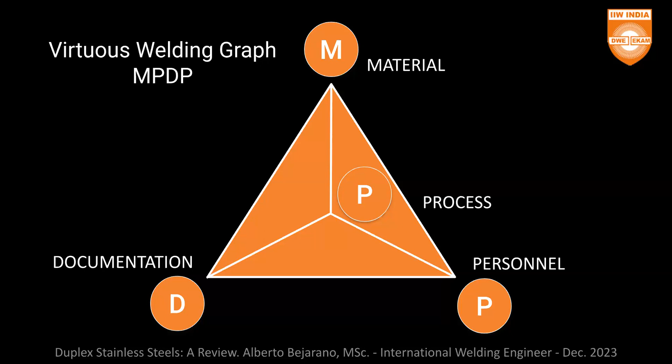Documentation is very important for us because there are a lot of different tests that we have to carry on in order to obtain a good qualification of our procedure, our WPS. Documentation, in this case, always is important - the standards, specification, codes, etc. in the welding world - but in this case, with duplex stainless steel, it's even more important.

So I want to share with you two phrases, two sentences that I consider are quite important for understanding this topic. The first one is: the best weld is the one that doesn't exist. Why? Because we have a beautiful raw material and a beautiful base metal with enormous advantages, but we partially destroy these beautiful properties.

So our idea, our goal, our challenge is how to weld, how to process this duplex stainless steel with the least damage possible. This is our challenge, and this is what I want to share with you today. And the main idea is to control the welding process. Every detail is important in duplex stainless steel, as we can see in a moment.

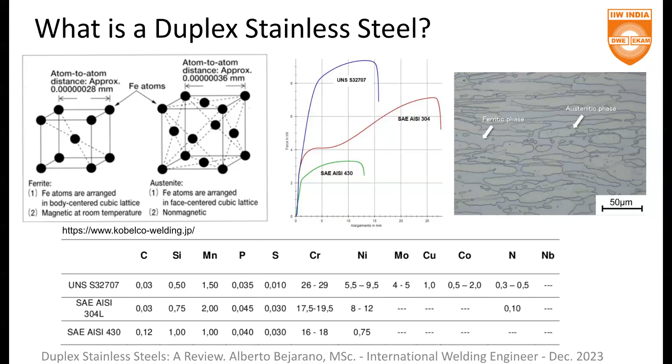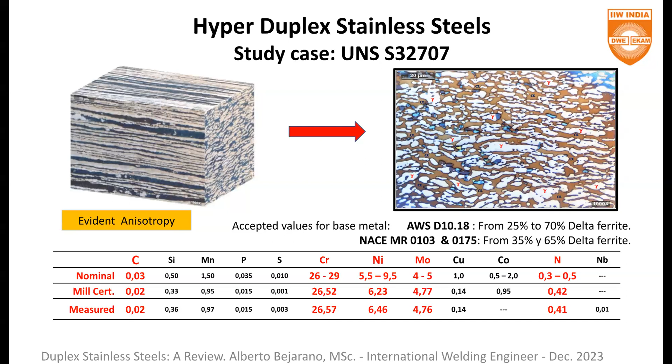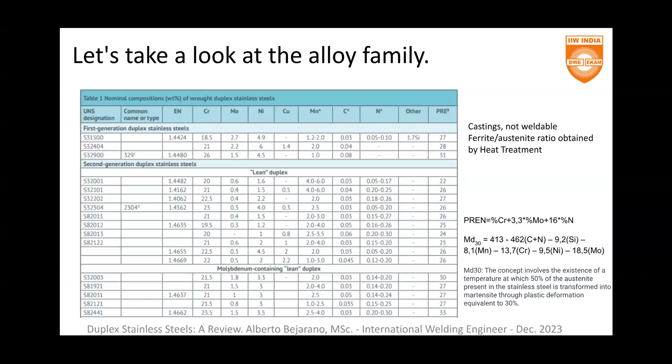And the top of the notch is the hyper duplex member, which is pretty... I think someone has his microphone open, so please turn off.

In hyper duplex, we are talking about 50 to 52, more than 50, which means that a hyper duplex has double the corrosion resistance compared to lean duplex. Which is quite remarkable.

If we see here in the austenitic family, let's take 316L, which of course has molybdenum, 316L has a PRE equal to 24. 316 is quite relevant in terms of corrosion resistance, and a hyper duplex has double the resistance.

And with a consideration very important in terms of money: if you see the quantity of nickel that 316L has, it's 11%, but hyper duplex only has from 6.5 to 7% nickel.

In fact, the promotion of this kind of stainless steel was done because of the crisis of nickel. The price of nickel had a rise that was pretty difficult for steel makers to follow. So they started working again with this alloy and family of alloys, and it was a total success.

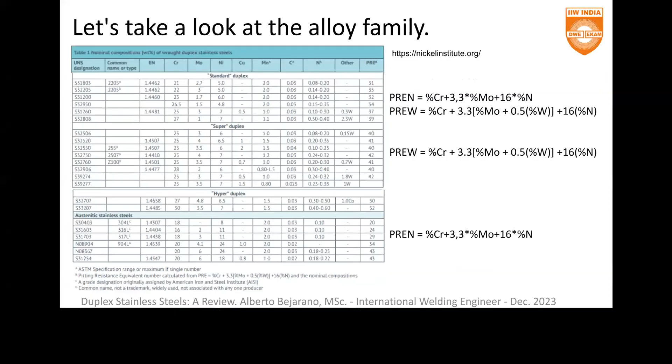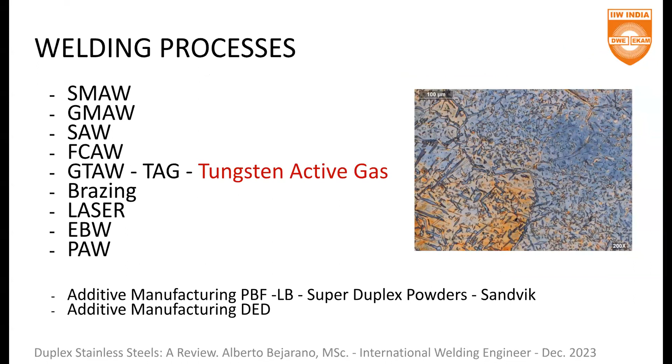In the weldment of duplex stainless steel, we can have pretty good results with shielded metal arc welding, gas metal arc welding, submerged arc welding, flux cored arc welding, gas tungsten arc welding, and even brazing is possible to be used with this kind of material, which is quite remarkable and very useful.

Laser, electron beam welding, and plasma arc welding. Of course, we have laser with or without filler metal, electron beam welding with or without filler metal, plasma arc welding with or without filler metal, and gas tungsten arc welding with and without filler metal.

Some people believe it's impossible, but it's not impossible. It's just a little more exigent in terms of control of the parameters, the technological parameters, the gas, the filler metal, the control of qualification of our process, the control over the staff, the welders, the tack welders, the supervisors, inspectors, engineers - everyone involved must be clear about what duplex stainless steel means. But everything is possible with duplex stainless steel.

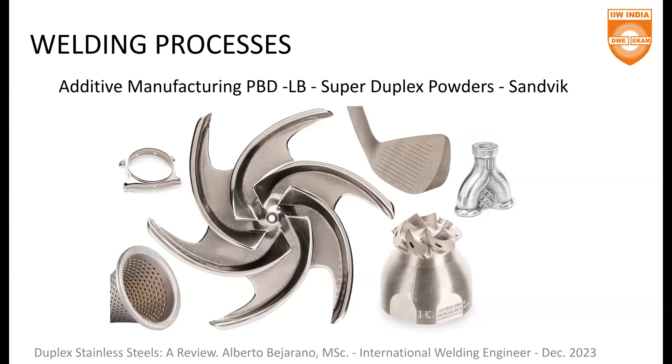So here we have some examples of products which are susceptible to being printed in duplex and super duplex stainless steel. This is powder bed fusion, which is very fine in appearance, and here we have welding processes. This is direct energy deposition, which is to weld layers and layers and layers of welding in order to obtain a base volume, which normally has to be machined by a traditional process in a CNC lathe or something like that.

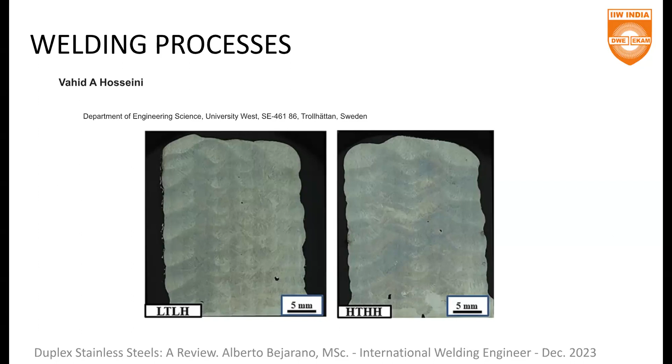But it's very important—here we have a macro showing us this research project from Vahid Hosseini from the Department of Engineering Science in Sweden, in Trollhättan. So as you can see here, layers and layers and layers of welding in order to obtain a block, to then obtain a piece.

Now let's talk a little about the filler metals. The problem, if you remember, is that it is not possible to maintain the initial properties in the base metal. So we have to add a little more nickel. Remember the two main elements here in this story: nickel and nitrogen.

So we have two options: to add nitrogen up to 2%, and we'll see why we use 2%. If we use filler metal, we add from 2% to 4% of nickel, because nickel promotes the austenite. Remember, the key here is austenite—we love ferrite, but we do really need austenite.

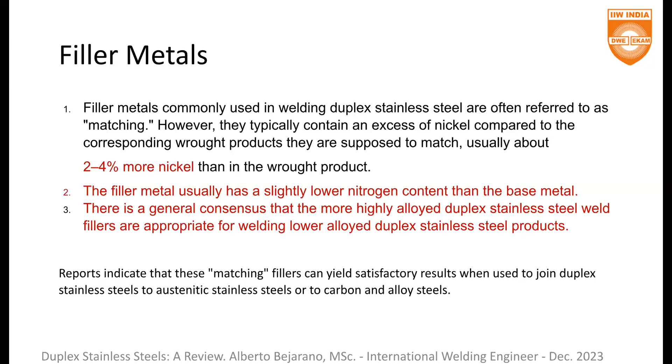And if we are not using filler metal, which is possible, we have to add 2% of nitrogen in the shielding gas—but not only the shielding gas, also the backing gas. It's very important. There's a lot of literature that tells you that you can use 10% or even higher percentages of hydrogen, which is very, very dangerous, because a shielding gas with more than 5% hydrogen is considered flammable, and flammable means explosive. So it's much better to work with nitrogen—2% nitrogen balance argon.

What about the filler metal? How can we select our filler metal? It's quite simple. Doesn't matter if you talk about ESAB, Certilas, or Sandvik—whichever—everyone will offer you an alloy with more than 2% or 4% above the original value of nickel. That's the key. Nickel 2%, 4%, that's all. They have it clearly. We know which filler metal is able to have a good response with a specific kind of duplex. So selecting the filler metal is not the problem—there's enough information about that, so don't worry about the selection of the filler metal.

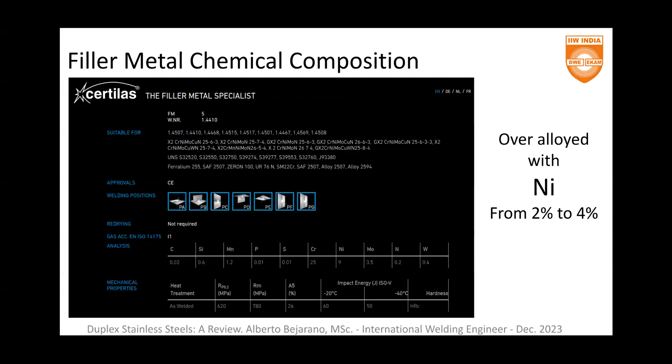So for instance, in that case we have 9% of nickel, which is higher by 2%. Let's check one or two products from ESAB—they have a line of products called Exaton. Exaton is the same: look at that, nitrogen, 8.5% of nickel, that's all. Of course, they have manganese, they have very low carbon, 0.040.

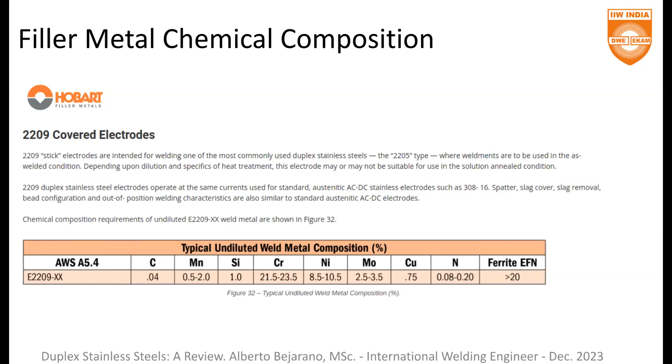The Exaton for GTAW, if we want to work with Hobart, is exactly the same. Hobart offers even more nickel, 8.5 to 10.5, in order to promote the generation of austenite. If we see Kobelco from Japan, the same logic - include more nickel. That's all, it's pretty simple. Of course we have to do the match between the filler metal and the base metal - that's obvious, that's logical, that doesn't resist any analysis. But it's not trivial, though it's quite simple. The most important thing is that if you understand the role of nitrogen and nickel, you will be successful in your work related with this kind of alloy.

Let's talk a little about shielding gas. Of course, shielding gas is related with GTAW, with tungsten inert gas. But we also have flux core shielded, and GMAW. Normally with GMAW it's pretty common to use 80% argon, 20% CO2. The magic is done through the alloying elements. You have a lot of literature that recommends hydrogen, helium, nitric oxide. In general, this is more an offer from the industrial gas producers, more related with marketing than produced through real experimentation.

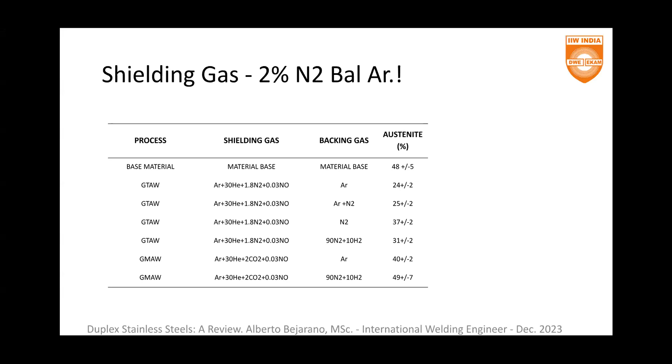So if you check, for instance, these pages, they give you the right mix. For instance, in Kobelco, if we work with super duplex stainless steels in flux core, we have to work in DCEP, direct current electrode positive, 80% argon, 20% CO2 - the all-life shielding gas, nothing special. If you see the standard duplex flux core, DCEP, 100% CO2. So the filler metal is not a problem because it has more nickel, and the shielding gas is not a problem.

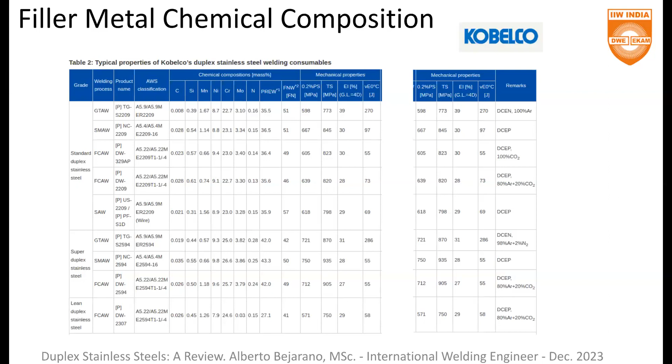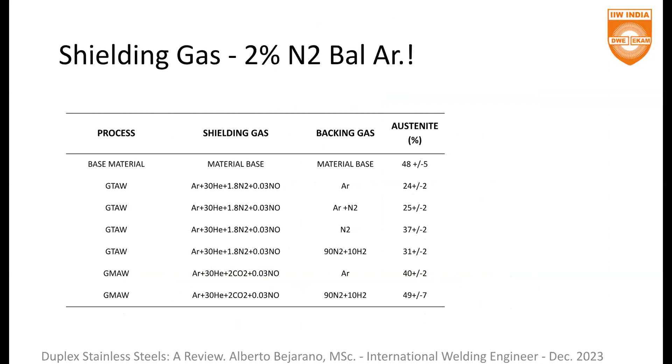Okay. So the shielding gas is not a problem if we have filler metal. Have that clear in your mind. Okay.

This is quite interesting. How much heat input was applied during the welding? Okay.

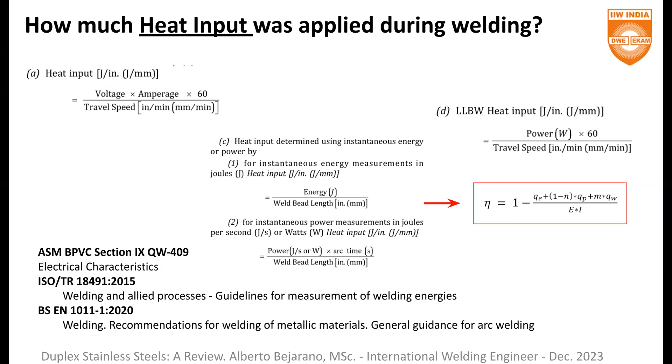Probably the most tricky thing when you are welding duplex stainless steel is that the cooling rate must be adequate. And when I say adequate, it means it can't be very low or very high. We need a cooling rate enough to produce enough austenite, because remember these alloys solidify 100% ferritic, okay? And not too much in order to prevent the precipitation of the deleterious phases.

Okay, so have this in mind: who defines the cooling rate? The cooling rate depends on the thermal properties of the material, and what is the amount, the quantity of heat that the base metal receives. Okay, this is quite important, and we have to talk about some details here.

Normally, the heat input is calculated by the use of the arc power, which means voltage multiplied by amperage, divided by the travel speed. This is a classical, traditional point of view, but it's only applicable, only useful with traditional technologies, which means traditional equipment with no other special control on the wave. Okay, the very basic equipment.

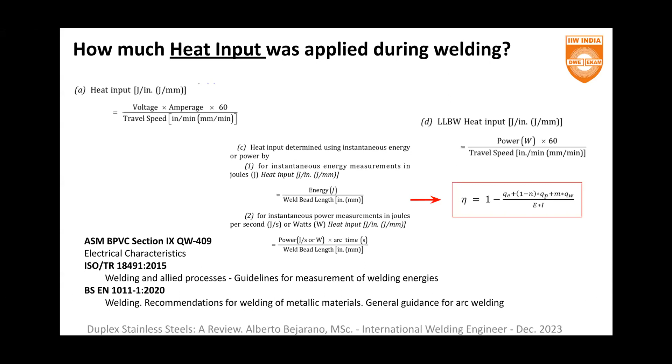Okay, and these losses are quantified by the use of an efficiency coefficient. As you can see here, I think it's eta, it's a value that affects the heat input, okay? This theoretical heat input. And this is quite remarkable because, as you can see here, only submerged arc welding has a K factor of 1. So if we calculate the heat input in submerged arc welding with voltage multiplied by current divided by velocity, this is the only case in which that value is real, because all the power in the electrode is given to the base metal. But in other cases, that's not true.

If you see, for instance, TIG welding is only able to take 60% of all the power in the arc and carry that power to the base metal. So we lose 40% of the original heat input, which means that at the end we need more power.

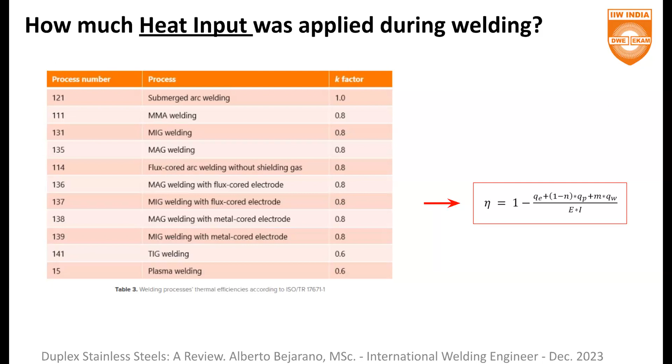And I will show you why this is so important. So real values for heat input using the K factor, having in mind the technology of your machine, etc. How much heat input was applied during welding? Again, we have this technical report from ISO which shows us how to calculate and measure these welding energies even in the field.

Of course, we have a very good document from Sweden, which is the guideline on how to measure current, voltage and arc power in arc welding. If someone wants this document, I can share it with you, no problem.

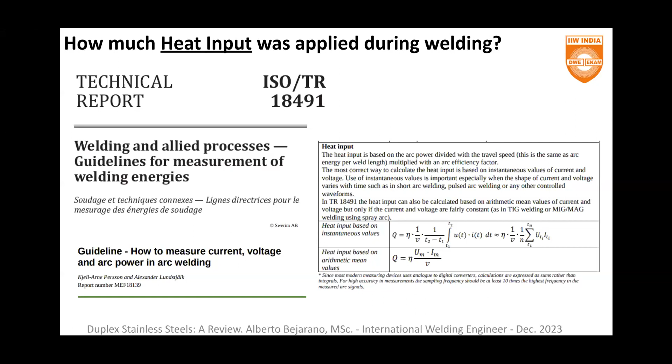Okay, this is the reason we need this equation. Let me check if I can use a pen here. Check. Okay, normally we use this. Let me show. Okay.

Normally, we are interested in this temperature, T8/5, right? So we need the thermal properties of our material, T0, which is the initial temperature, and the heat input, and that's all. We need this temperature.

But in this case, when we are talking about... I'm sorry.

When we are talking about duplex, we are interested in this temperature, T12/8, okay? But we needed this one in order to calculate this one. And why this time is so important - it's so important because we have to be able to cool our alloy.

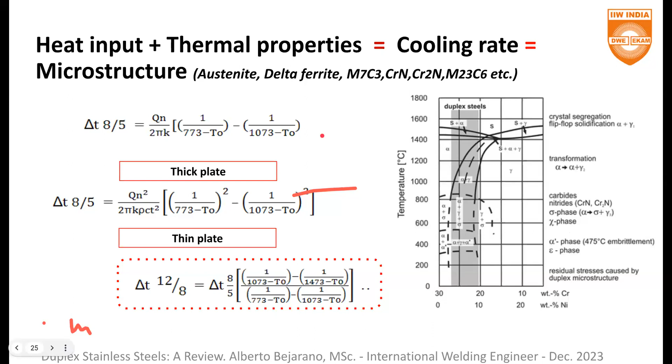Of course, as you know, we have to consider if we are welding a thick plate or a thin plate. The difference is: if I'm able to weld using just one bead, that's a thin plate. If not, it's a thick plate and I need more than one bead - we're talking about a multi-layered joint.

So my idea is to come here from liquid and don't touch these curves, these noses. It must be enough to produce austenite, and must be very quick not to touch these noses. That's all the clue of this material.

Of course, it's quite difficult not to obtain at least a little amount of these deleterious phases, but it's what it is. Nobody wants residues or losses, but the real world is full of this kind of losses.

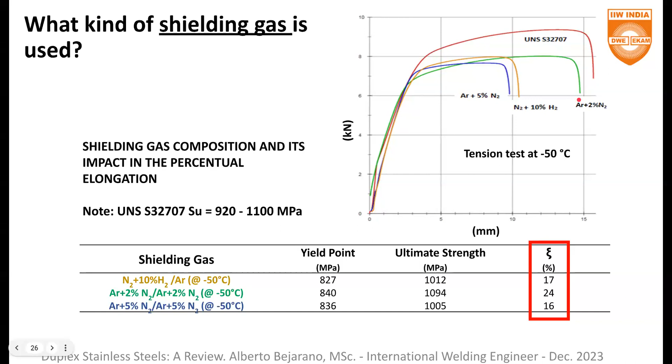That's pretty good. If you see here, even the percentual elongation is a product related to the shielding gas you are using. Imagine that with 2% nitrogen you obtain 24% elongation, and only 16% with 5% nitrogen - that's pretty amazing, because the difference is only 3% nitrogen. Pretty good, I hope you are following me.

Good, so we decide which base metal we will use, we select the filler metal, we select the process, we select the gas. And now what happens? We calculate my heat input.

We calculate my real heat input by use of this K factor that we mentioned some minutes ago. And now what? How could I know if my joint is solid, if it's good?

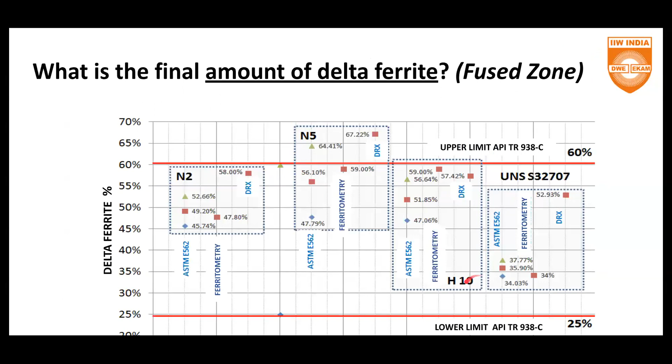36%, okay? This is the value of my base metal, right?

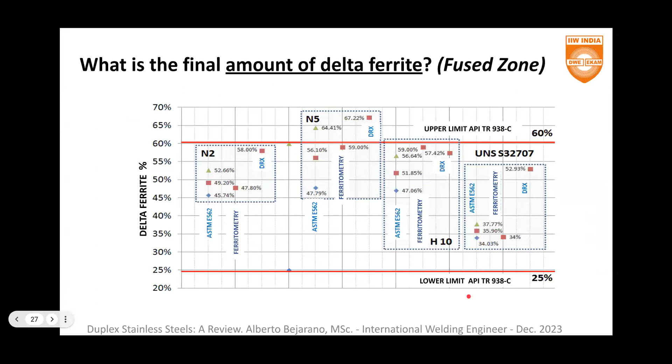And by the use of 2% nitrogen, 98% argon, we obtain this value: 49% ferrite, which is not bad, because we are between two limits. The first, the lower limit of this delta ferrite, is API TR 938-C, which allows you to obtain 25% as minimum to consider that your work was well done. But we also need an upper limit, and the upper limit is 60%, which comes from the same standard - API, American Petroleum Institute, TR 938-C. Pretty good, this is amazing.

We select the filler metal, the base metal, and so on. Now we are evaluating the result, and this evaluation is quite important for the qualification of our procedure. So if we take, for instance, ASME Section 9 from the Boiler Pressure Vessel Code, which is aimed to guide you with the qualification of your process and your staff, you won't find any information about these details. They tell you, okay, you need 2 tension tests, 4 guided bend tests, whatever. But remember that what rules over Section 9 is the construction code. So the construction code gives you all these little details, and if the construction code doesn't mention anything, you have to talk with your client and ask him what his need is, and try to find the best solution for him.

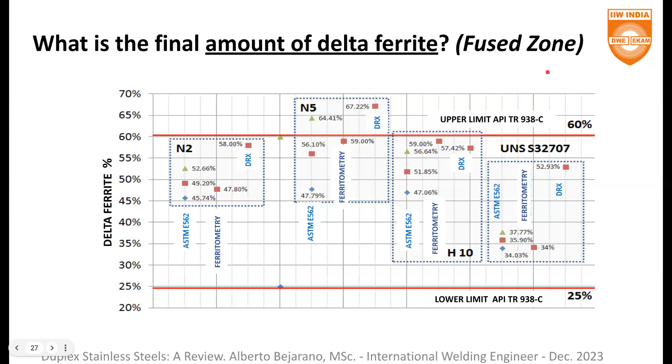But you need to know that it's very important to measure the proportion, the ratio between ferrite and austenite. This is the case of the fused zone, or the weld metal. But also we need to know that, as in other welding processes, we are concerned about the heat affected zone. So we want to know what happened with the changes that we produced in the heat affected zone, and we have two options.

Sorry, can you hear me? Please continue, please. Yes, yes, I can hear you. Please continue. Okay, thank you. Thank you, I think my time was over. Thank you, you can continue.

Okay, so we have evaluated the base metal. We have evaluated the weld metal, but our main concern is what happened in the heat affected zone. So the only method that is useful for that is to use ASTM E562, which consists in taking bidimensional information and trying to project this characteristic into a volume.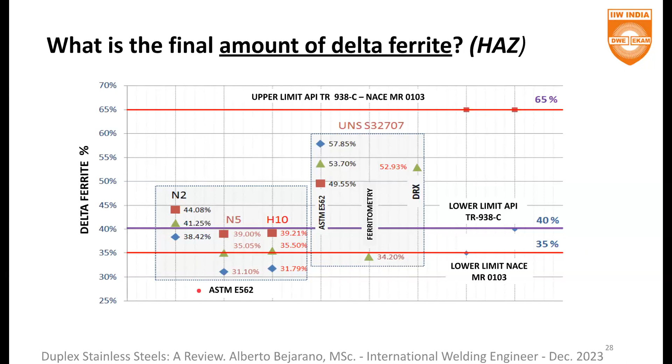So if my amount of delta ferrite is between these two limits, we have done a good job. Again, the best option is to measure the delta ferrite during the qualification process, not during welding in the field, but in the qualification of the procedure. Use ASTM E562.

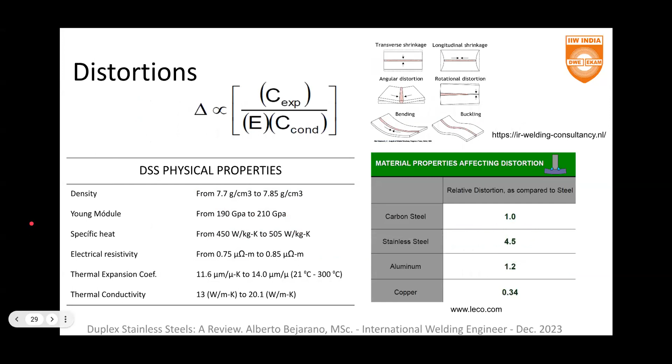Now let's talk a little about distortions. We know that if we compare carbon steel with stainless steel, stainless steel is more prone to distortion. It is expected to have more distortions in stainless steel than in carbon steel.

The reason for that is the relationship that exists in the physical properties of our base material. The base equation we have in mind is this: distortion is proportional to this relationship. So if we have a higher Young's modulus and a higher conductivity, we have lower distortions. And if we have a higher expansion coefficient, thermal coefficient, of course we will find more distortions at the end of the day.

So the main idea here is that in duplex stainless steel we will have less distortion than those expected in austenitic stainless steel, which is very good news for us. But of course, we have more distortions if we compare duplex stainless steel with carbon steel.

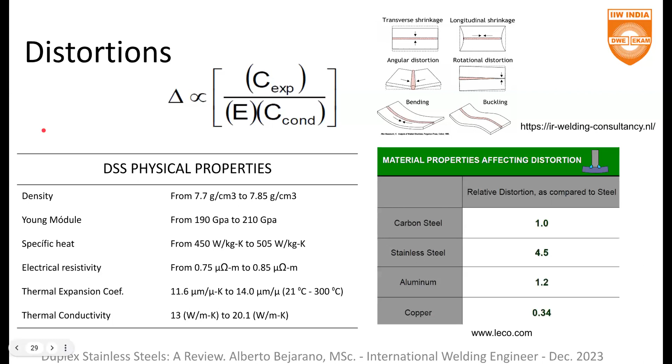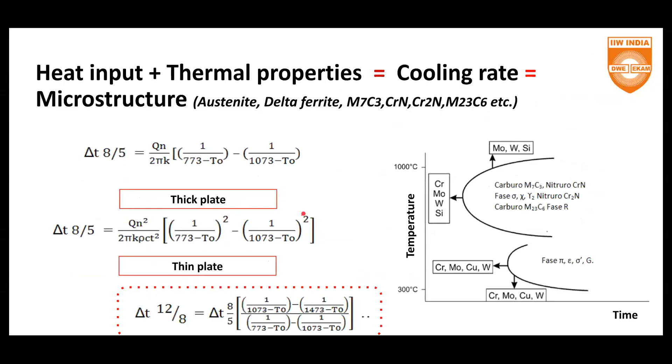The interpass temperature is another thing we have to keep in mind. If you remember, when we try to calculate this temperature called 8/5, we take into account this T0, the initial temperature of our base metal.

So another fundamental, critical idea: we never preheat duplex stainless steels. Of course, there is an exception. If we are, for instance, in Canada and we have to weld at -20 Celsius, of course we have to raise that temperature to at least 20-25 Celsius. And if in that case we need to preheat, go ahead, preheat, but not too much.

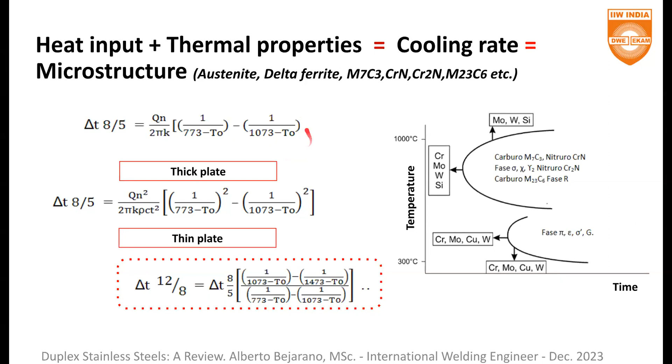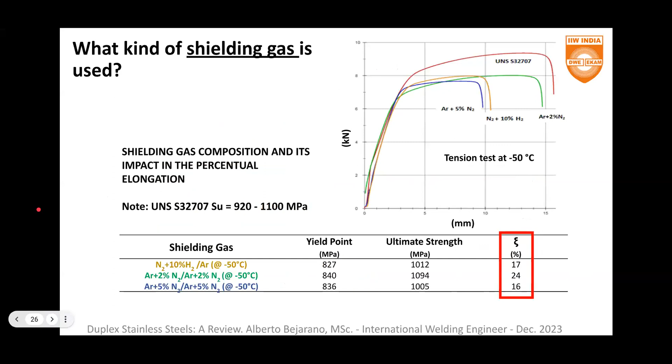And as we mentioned a minute ago, we need this initial temperature, which is related to the preheating. This interpass temperature is obviously related to multi-layer welding with thick plates or pipes or whatever. We have to keep in mind that it's necessary to control the interpass temperature.

How can we measure this temperature? The best options are thermocouples - not crayons, not infrared thermometers. Thermocouples are the best. This temperature is related to the cooling speed, so we have to control this interpass temperature.

What is the limit? Which is the recommendation? Remember, as higher the level of alloying, as lower the interpass temperature. So in duplex, the lower alloy members of the duplex stainless steel family, we can use 250 Celsius. If we talk about super duplex and duplex, we can talk about 150 Celsius. And in the case of hyper duplex, the recommendation is 100 Celsius.

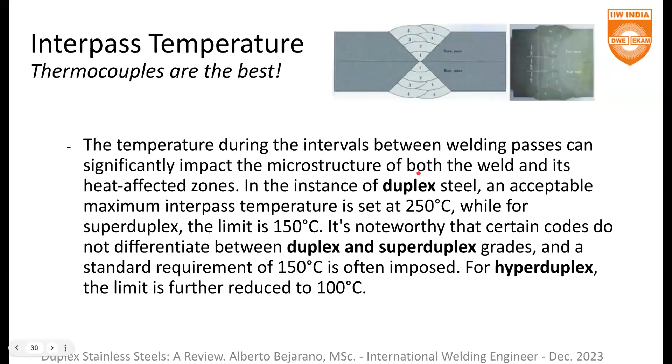This is very important because this interpass temperature becomes this T sub zero. T sub zero is related to the cooling rate. The cooling rate is related to the amount of austenite, and as you remember, this relation between all the variables and the process is true. We have to consider everything, try to do our best to control our welding process - that means controlling base metal, filler metal, shielding gas, the procedure, the qualification of the welders, the way in which we measure ferrite, etc.

About the electrical parameters, which means basically voltage and current, we have a lot of information. Of course, if we are consistent with everything we've mentioned before, we have to be careful that the heat input calculated here with these parameters is appropriate.

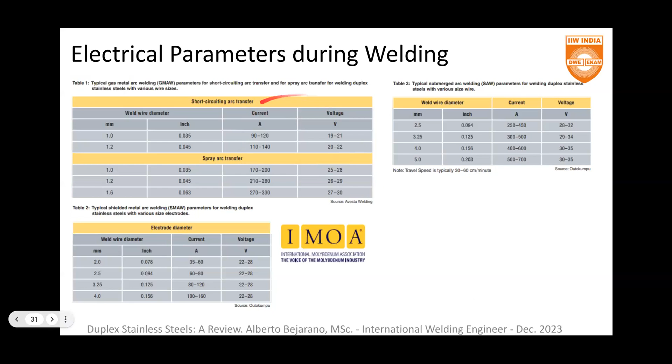Between the cooling rate that I need - because remember, the heat input defines the cooling rate together with the thermal properties. The cooling rate defines the final metallurgical properties. These metallurgical properties define the behavior of my duplex stainless steels in front of a corrosive environment.

So we have a lot of information, but good information. This, for instance, is taken from the IMOA, the International Molybdenum Association. We have a lot of valuable information, not commercial information - take care of that - but technical information from the IMOA and the Nickel Institute. The Welding Institute, of course, has beautiful information. The International Welding Institute has amazing information. The Welding Handbook could be a good source of information.

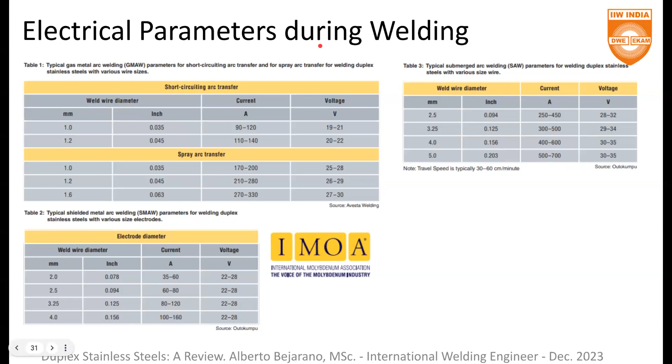Preheating? No preheating, please don't do that. Considering something like 6 to 8 millimeters for... As I mentioned before, it's really hard not to obtain at least a little amount of these phases, which means carbides or chi or sigma phase. It's a little hard to obtain 100% ferrite and austenite.

No, it's quite difficult. So in terms of our construction code, we have to check what is the maximum amount allowed of this kind of phases. Zero is too hard to obtain, it's almost impossible, and it's even hard to detect this kind of phases - hard to know which is which. So this ASTM A923 helps us detect this kind of phases.

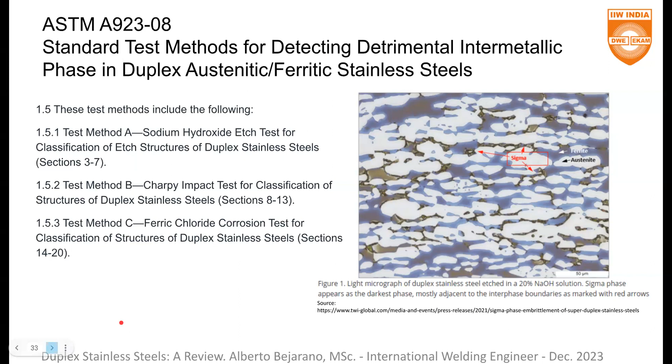Okay, pickling and passivation, and I think we are finishing. Please tell me when to stop, because I have a lot of things to say, but I don't know if we have enough time. Okay, pickling and passivation.

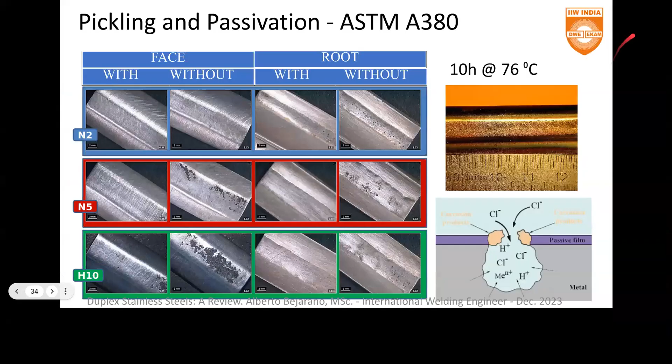Right here, you can see these beautiful colors produced on the surface of a hyper duplex stainless steel. This is the color produced by 2% nitrogen balance argon. These beautiful colors - but we don't need those colors. We need a clean surface without these oxides. These colors are the proof that we have oxides there.

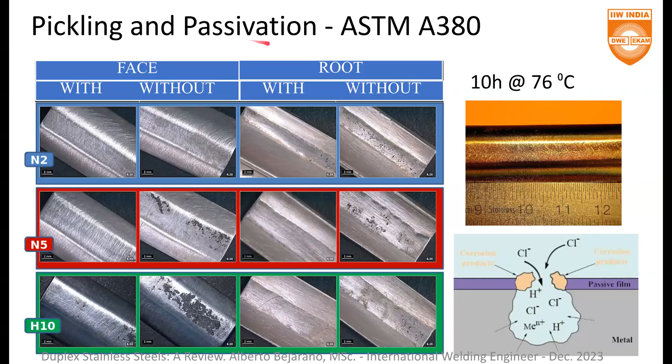So we have to develop, to set up the pickling of this stainless steel. Normally this is possible on the face, not on the root, because normally it's impossible to access the root once the weldment has been done. So we need to pickle the surface in order to remove this coloration, this tinting, and we have to passivate the surface in order to obtain a new solid layer of chromium oxide, which is the skin that protects our duplex stainless steel.

Here we have a typical joint - again this is a hyper duplex. You can see the change produced by the heat, by the thermal cycle, in our base metal. In the heat affected zone we can see all these tiny grains here, and in the weld metal or fuse zone we have this kind of islands, which are very interesting as we will see in a moment.

Okay, this is pickling - this is the pitting that we have. Simply the ferrite is dissolved and the austenite is resisting. So this is the reason why we need enough austenite.

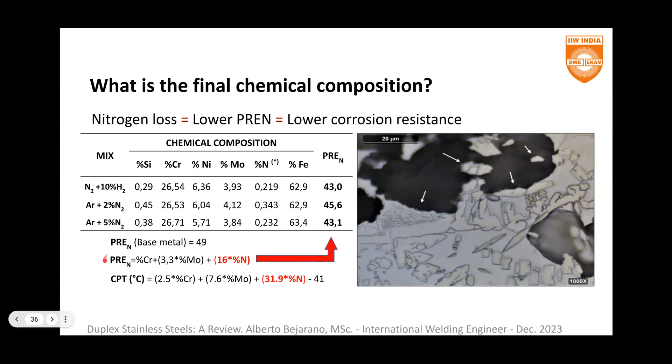Another thing to mention is that during the welding cycle, we can lose nitrogen. So if we lose nitrogen - and nitrogen is the most important value in the PREN equation - if we lose that original quantity of nitrogen, the PREN will decrease. So we will have a PREN in the base metal, a PREN in the heat affected zone, and a PREN in the weld metal. So this is another reason, a new reason, to facilitate the generation of new austenite by adding nickel or by adding nitrogen in the shielding gas.

Okay, and we have been talking about pitting resistance equivalent number, right? We talk about PREN including nitrogen, but also PRE including wolfram or tungsten. But this is related to pitting.

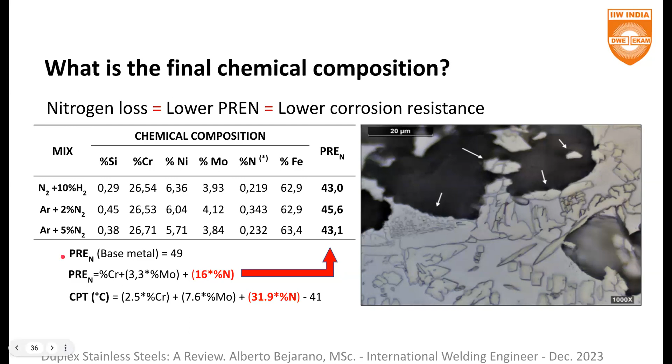Pitting is like a little worm eating our metal, a little perforation. In some cases it's very hard to detect until catastrophic failure, so it's critical to control this pitting. But there's another phenomena that could be even worse than pitting: crevice corrosion, related to resistance temperature. Let me show you what I'm trying to tell.

In a moment we will follow with this previous idea. We know we have a lot of constitution diagrams like this one, designed to predict how much delta ferrite we will have after welding, based on the chromium equivalent and the nickel equivalent. There are a lot of these diagrams, at least nine or ten, and it is possible to use them to predict the final amount of delta ferrite in my joint.

Is it possible or not? Well, what is the official position of the Welding Research Council on using this kind of constitution diagram? It's like trying to predict the weather. It could work, could be useful, couldn't be useful. So it's a guide - yes, a good guide, but not necessarily the best. Here I'm showing you all the mathematical models I used in research some years ago.

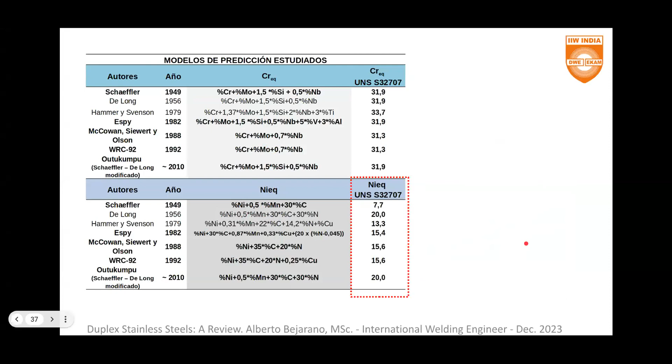It's better to use the DeLong, the DeLong modified Schaeffler. This is the reason we have a constitutional diagram called Schaeffler-DeLong: DeLong modified Schaeffler, considering in this equation the role of nitrogen, which in a classical Schaeffler diagram we won't find. There are a lot of other diagrams - the most interesting could be the Schaeffler-DeLong modified, which is called the Outokumpu diagram. We will see that diagram in a minute.

So take care when you are trying to predict the delta ferrite, especially when welding dissimilar metals. This diagram is very useful, but we have to know how to use it, and when to use it and when not to - which is even more interesting.

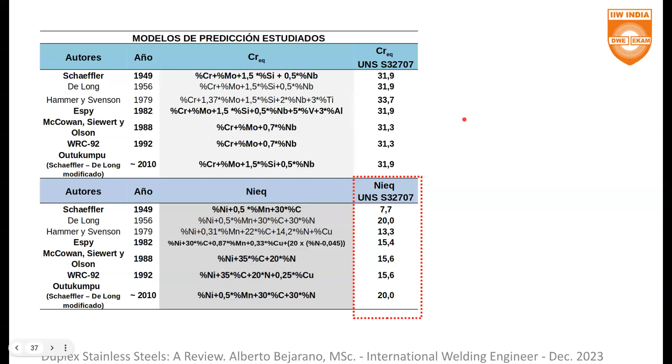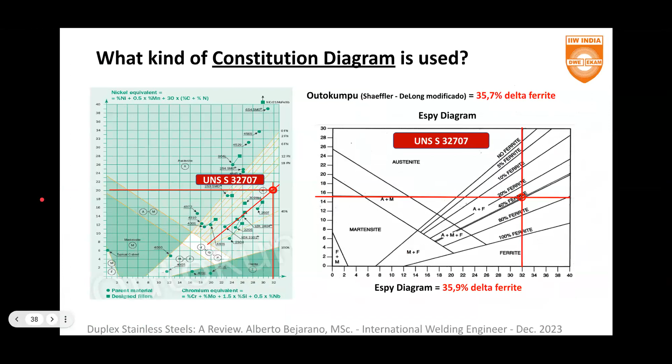This green one is the Outokumpu diagram, and as you see, we have chromium equivalent, as expected, and nickel equivalent here. You can see the equation and the role of nickel and nitrogen. So it's pretty good, pretty accurate, this constitutional diagram.

But nothing is perfect. If you see here, this diagram works with Fn, ferrite number, but the ferrite number is not necessarily equivalent to the percentage, the real volume of austenite or ferrite in our material, or in our heat affected zone, or in our weld metal.

It's related with them, basically. It's a little hard to explain, but the main point is that one real thing is the volume of ferrite expressed as a percentage - 20%, 30% - something real. But ferrite number, from my point of view, is just a source of confusion among people.

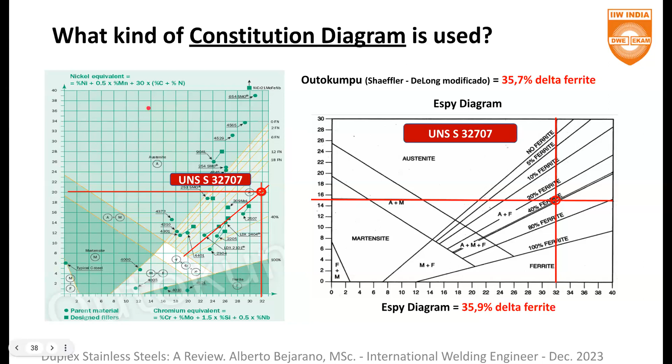We just calculate chromium equivalent and nickel equivalent. There will be a point in which these two values cross, and we calculate based on the slope what is the amount of delta ferrite. Okay, very good.

You can see the difference between the percent of ferrite and the ferrite number. Both start at 0. But as this ferrite starts growing, the ferrite number loses this linear relation. Starting from 0,0, but 13.8% real percent of ferrite represents 16 ferrite number. It's a number, it doesn't have any unit, it's just a value.

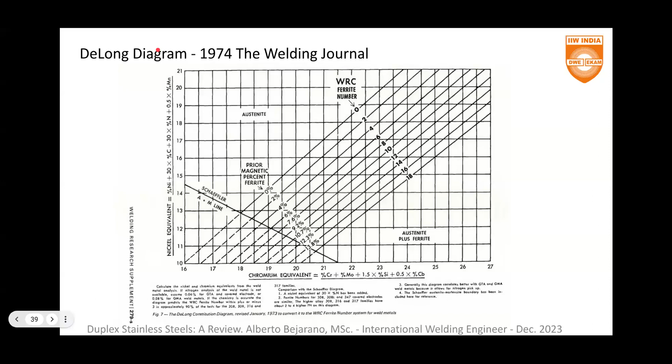This is an old topic. Schaeffler comes from the 1940s, and now we have some new diagrams. So this is another mistake, pretty common.

People say, 'Don't worry, I'll calculate, not estimate.' We have been doing estimations. Remember that. Some people will tell you, 'I can calculate the ferrite for you,' and that's not real. At least not real or not possible for welding, because it's very expensive... how can I say that... how to obtain an accurate ferrite ratio.

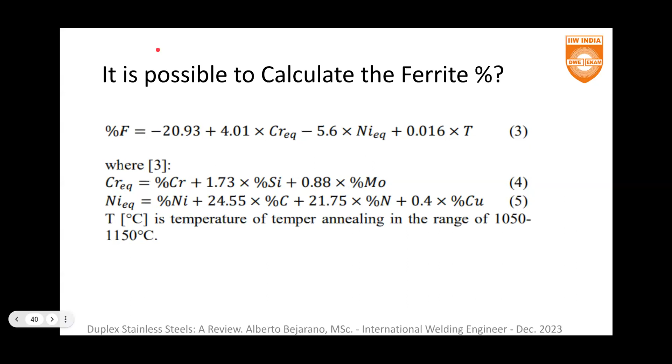Yes, this is useful. This equation, this percentage of ferrite, is useful just in case of not weldments, but well, I forgot the word in this moment, but come on, it's not forgings. This is useful for the first member of the family of duplex stainless steels, not weldable, but aimed to be used as... I forget the word. Okay, so it works more or less the same.

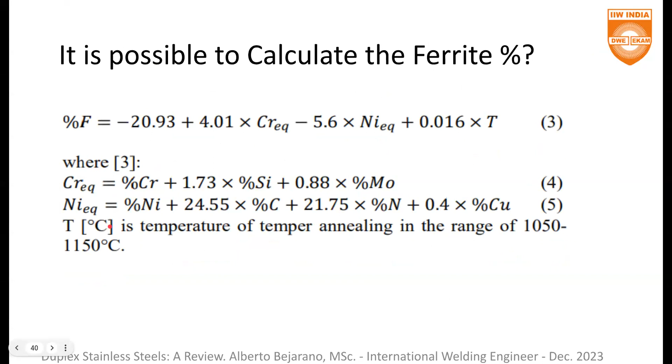We calculate the chromium equivalent and nickel equivalent, and that temperature of temper annealing. This is very important: the temper annealing, which is between 1050 and 1150. But this is not for welding, so take care with that.

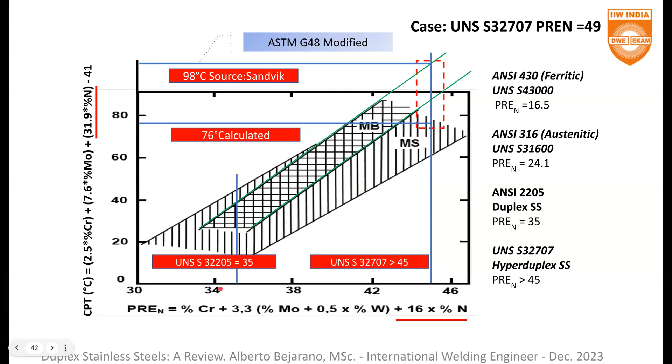This is the PREN. There is a question here: if the pitting resistance number is just a kind of number useful to compare members of the family of duplex, duplex and austenitic, and ferritic alloyments, is this really useful? I mean, does PREN work for something different than to do these comparisons? And the answer is yes.

There is a linear relationship, as you can see here in this slide, between the PREN or pitting resistance number and CPT. This is very important, because CPT is a critical temperature for pitting, which means at which temperature pitting is expected. So this is very real - I can take a thermometer and measure the temperature and know if we will have or not pitting.

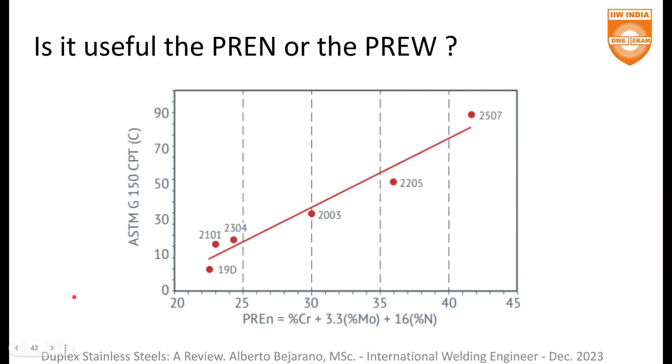So here's another recommendation for you. In duplex stainless steel it is absolutely not allowed, it's prohibited, it's mandatory to not have arc strikes. It's not allowed to have... I can't remember that word in this moment... it's not sparks, it's spatter. The spatter is not allowed. Why? Because if the spatter hits the surface of our beautiful duplex stainless steel, we will have a little zone which will be cooled very, very quickly, and we don't have any austenite in that point. So that is the perfect point to get pitting. So spatter or even arc strikes are not allowed. This is very important to know.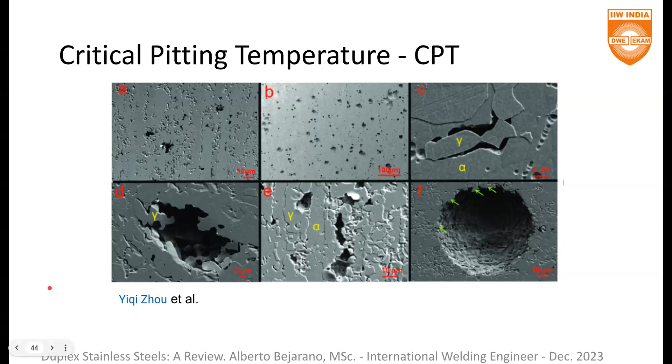Let me show you, I think I have some examples. This is pitting, of course. This is the base metal, this is hyper duplex stainless steel. This is a very tiny sample - I think from here to here it has 12 millimeters or something like that. So you can see here the damage produced by pitting during test, of course, not in service.

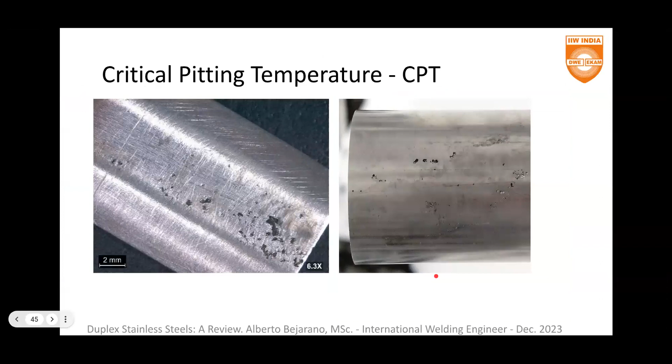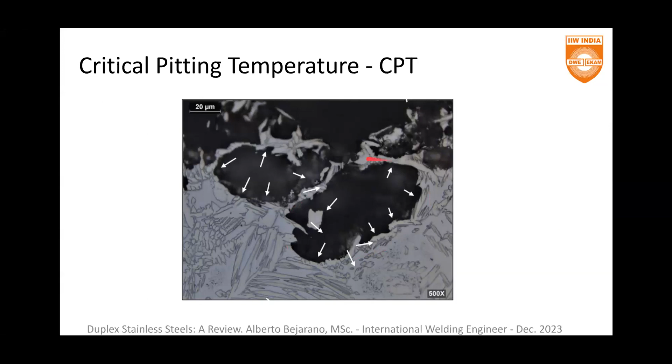But this, yes, this happened in service. This is a very beautiful picture from Outokumpu. Here is how you can see the corrosion in a duplex stainless steel. The ferrite is dissolved, and the resistance to corrosion is done by austenite. As you can see here, it's a kind of island of austenite. So these closed zones by austenite are pretty good in order to... so ASTM G48, the temperature for... I don't know where you can see.

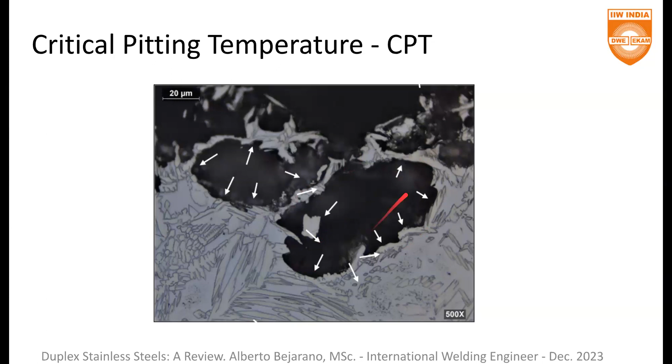This is a kind of island, but this island was broken here, and the ferrite, the delta ferrite, was dissolved. Okay, this is the problem with the ferrite.

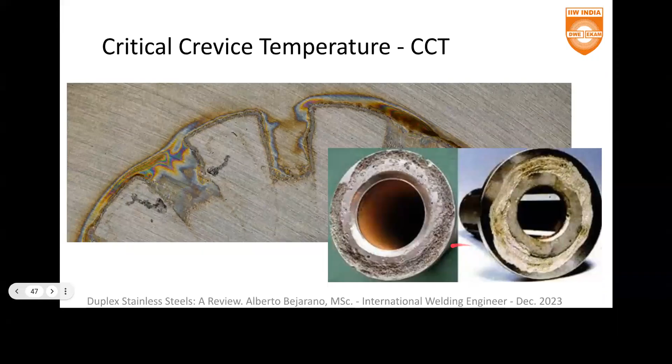And we have another problem directly related with corrosion, which is crevice corrosion. Crevice corrosion happens when we have two faces in contact, a face against another face, as in this picture. Two plane surfaces, one against the other one.

Imagine that we have mentioned that the chromium oxide, which is the skin of our stainless steels, is produced by the oxidation of the chromium in the alloy, right? So if for any reason this layer is damaged, naturally the reaction between my base metal and the oxygen of the atmosphere will produce a new layer, a new passivation layer.

But what happens if we don't have any oxygen? Without oxygen, we don't have oxides. If we don't have oxide, we are not able to reconstruct the layer of chromium oxide. And this is what happens when two surfaces are in contact - there isn't any oxygen between them.

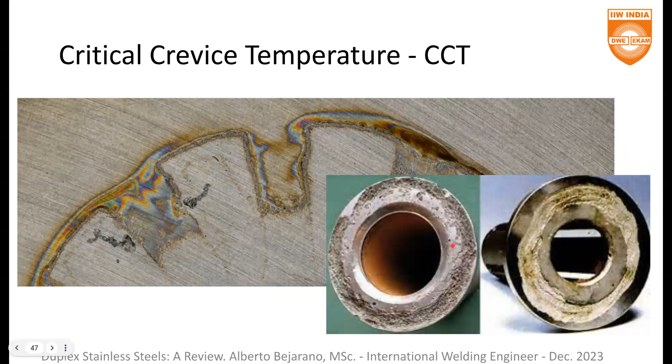But what's the problem? With the lower loss of material, a pitting corrosion can destroy a duct, a work, a plate, okay, with a very, very, very little amount of material deteriorated, we will have a catastrophic event.

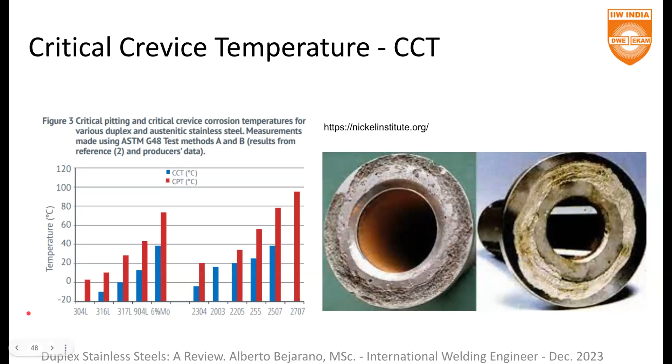Because we have to focus on CPT or CCT, okay? Very good. Okay, I think I have one or two more slides.

What happened with the stress corrosion cracking? The stress corrosion cracking is a concern with austenitic steels, as you know, which means that we have cracking, but at the same time we have stress, and at the same time we have some up to a point corrosion.

So it's the situation in which we have stress, which is always present because of the residual stresses, but also corrosion, because of course if we are investing time and money in duplex stainless steels, it's because we are exposed to any kind of corrosive substance - liquid, vapor, solid, whatever. And cracking because the damage is enough to break the material, like little cracks.

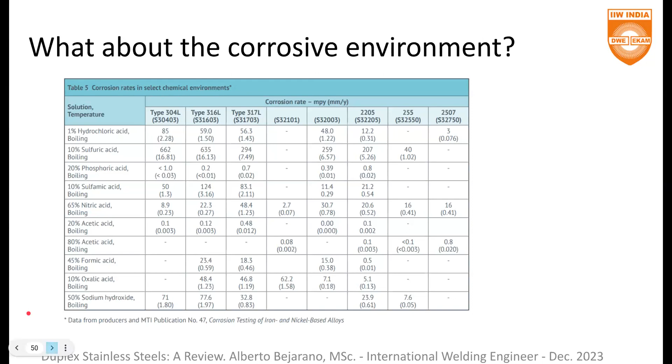The final recommendation is to be patient during the metallographic preparation. You will need a good metallographic preparation if you want to measure how much ferrite you have, for instance using software to measure the ferrite, or if you are interested in using ASTM E562. It's not trivial to prepare micrographs, because the material is hard and extremely resistant to corrosion. So to etch this material, it's a little tricky.

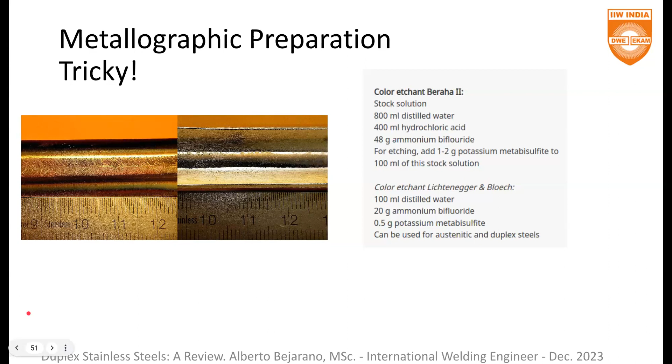My best recommendation is to use Beraha 2, which is a solution made with water, hydrochloric acid, bifluoride ammonium, and a little potassium metabisulfite. You dissolve everything and you will be happy. But it's not trivial - there is a learning curve with this kind of material.

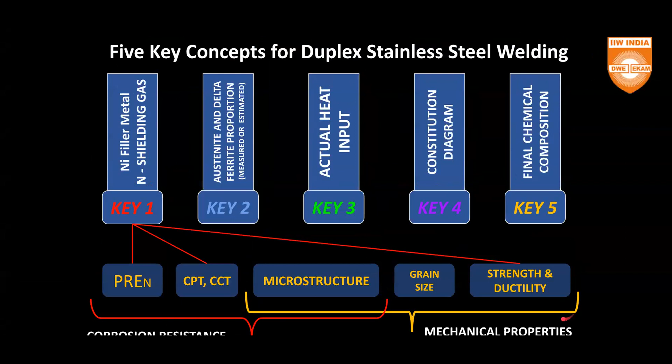Let me finish. We will now understand the graphics we saw at the beginning of this conversation. We mentioned that nickel is very important, as well as nitrogen, because they have a direct relationship between PREN, CPT, and CCT. But also this amount of nickel and nitrogen is related to strength and ductility, because if we don't have enough austenite, we will have less ductility, since ferrite is less ductile than austenite.

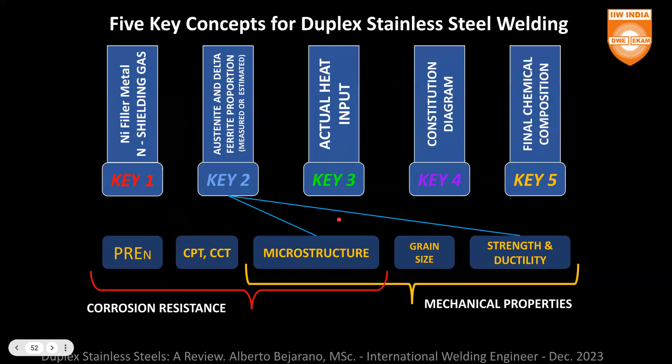Austenite and delta ferrite are of course related to the microstructure, and obviously to the strength and ductility, because at the end of the day the strength of our alloy is the strength of the austenite multiplied by its proportion, plus the resistance of the ferrite multiplied by its proportion. So it's not the same to work with a 100% ferritic stainless steel as to work with a 100% austenitic, and very different again to work with duplex stainless steel. Everything is related.

Now, the actual heat input has a direct relationship with the microstructure because heat input defines the cooling rate. The cooling rate defines the amount of delta ferrite. The amount of delta ferrite defines the amount of austenite. The amount of austenite and delta ferrite defines the mechanical properties. So everything here is related - there is an expression in English for that: you can't cut corners. You have to consider everything very carefully.